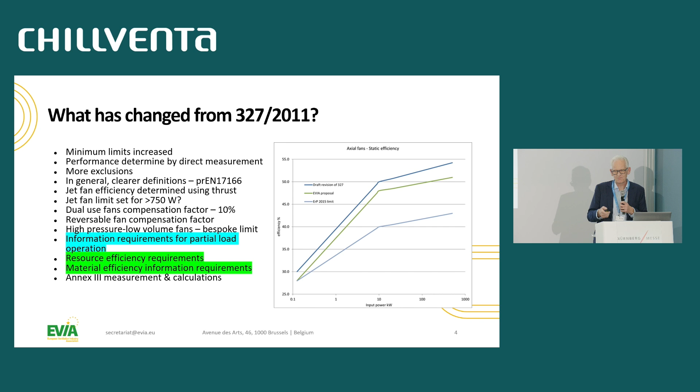The blue and the green, though, is the start of what's coming next for us in the future, but also other products. It's the circular economy, the sustainability aspects. I would argue these are fairly simple, but they are a big impact on us as a business. We have to produce a lot of information to meet these requirements, but it gives us an indication of what is going to come next.

Sadly, the regulation that was published in July has got some errors. So one of the errors is in Article 9, and to be clear, the application of the requirements of this regulation will happen in 2 years' time, and it will be 3 years for fans integrated in other products and 13 years for spare part fans. That doesn't say that there. So Ronald Piers is in the process of raising a corrigendum, a correction. And also, we found, when it was published, there was a tolerance of 2% on speed, which many fan manufacturers will find challenging. So we've managed to persuade the Commission that we should change that to 5%.

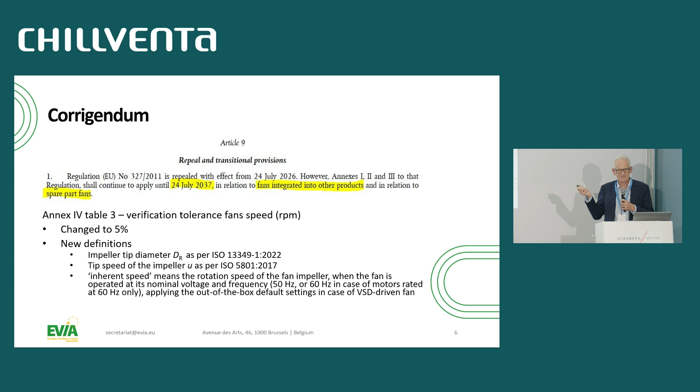But member state Italy wanted some extra definitions in impeller diameter, tip speed, and what is the speed? And so when do we measure our performance? Do we measure it at maximum speed, and what is maximum speed? That's still causing us problems, even though we have lots of definitions in standards. The text there is what the policy officer has put into the revision. If you don't like it, we have to try and persuade otherwise.

Okay, status of the standard: there's a standard that did run parallel with the review of this regulation. Unfortunately, it's been delayed because of COVID and some confusion, but it's now in a position where it's gone back to inquiry and it's out for voting. So those of you that are involved with member states standards groups, make sure you put your vote in and make your comments now, because this standard will be reviewed later this year. The changes were feedback from the policy officer. There were some things in this draft standard he wasn't happy with. We'll try to take that on board, but we need this standard because it adds clarity to the regulation.

There's some interpretation. Even though this regulation has been published, some things still aren't very clear. And so the industry, Eurovent and European AMCA, for example, have really started the process of frequently asked questions, and EVIA will be part of that. And some of it is things like this compensation factor for the guard. There was some text on the left that Ronald Piers put in to previous comments around the revision that hasn't gone into the main standard, which is probably good. But the compensation factor for this guard is based on the gap between the rings of the guard. And the question is, if you had a guard where the gap in one place was, say, 6 millimeters, but the rest was at a gap of 15 millimeters, which compensation factor should you use?

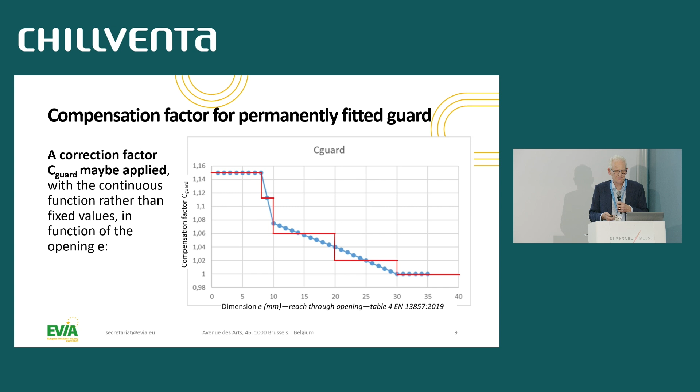The problem now, though, is what compensation factor would the market surveillance apply on you? Because you make a decision. You might think, oh, well, I know what I'm going to use. I'm going to use the 1.16 or 1.15 compensation factor. But the market surveillance could have a different opinion. They have more power than you, and therefore they could say, you've got it wrong, you've got to change. So we need some clarity there, and that's where we as an association have got to work on these FAQs that we can put towards Ronald Piers, and hopefully he will adopt the FAQs from industry.

Okay. What I wanted to major on more in my slot was the new things that have come into this regulation since the last regulation, and it's the circular economy things. It's environmental impact in the form of resource efficiency and material efficiency. This is, in some ways, simple, but it creates work for us as manufacturers. We now have to provide spare parts. We have to provide them within 6 weeks. We have to provide information on how to dismantle our fans and how to repair our fans.

Yet there's still some grey areas that we as an industry have to think about how we handle. For example, variable speed drives. If the variable speed drive is integrated in the electronics of the motor drive, how do you provide that as a spare part?

So therefore, there's some interpretation that we need to make to put towards the policy officer to get them to agree: is this a good interpretation? Can we provide spare parts this way?

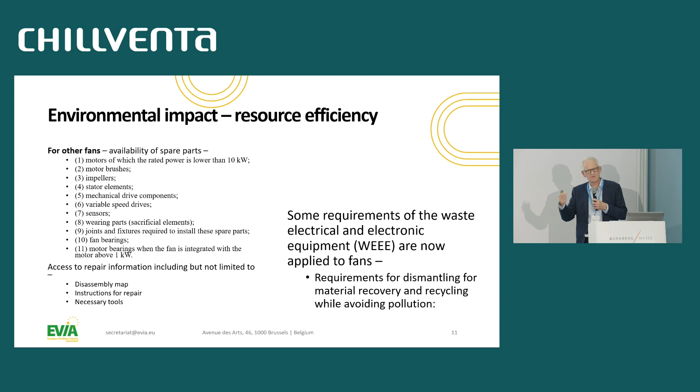The regulation also now starts touching on other ones. I remember a lot of people saying the Waste Electrical and Electronic Equipment Directive has nothing to do with our product. It does, because we've just been sucked into it. Inside the fan regulation is a reference to the WEEE regulation, and therefore for chemicals mentioned in the WEEE regulation, we have to make sure if they're present in our product, we make a declaration they're there. We have to explain how to remove them at end of life. How can you extract those chemicals, and how can you reprocess them?

Material efficiency is probably not the right heading in the regulation, but this is what the heading is. It's talking about how we have to provide professional repair services. Do we have to do that as a business, or do we have to point to somebody else? And also providing information on spare parts. And one that I didn't highlight is proprietary tools, special tools. So if we need special tools to take our motor and fan apart, we have to provide that information. But how much? Do we have to provide information on how they make it, or what it looks like?

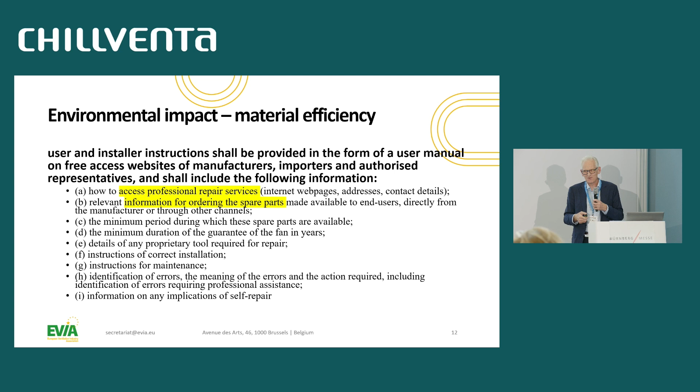And then what's next? We know what's next in Article 8 of the regulation. It states very clearly what will be reviewed next time. So, for example, the Commission will look at fans below 125 watts and whether it's appropriate to regulate them or not. But I've highlighted the circular economy aspects. Resource efficiency, repairability, reuse, recycling will definitely be looked at. And we know that because the overarching regulation, ESPR, will say so. That's what's going to be applied onto our regulation.

But it's 6 years away. And it took the Commission 10 years from the review study to publish. So you could argue it's 16 years away. So why are we worried about this, and also the need for digital product passports? We could be 16 years away before we need to do that.

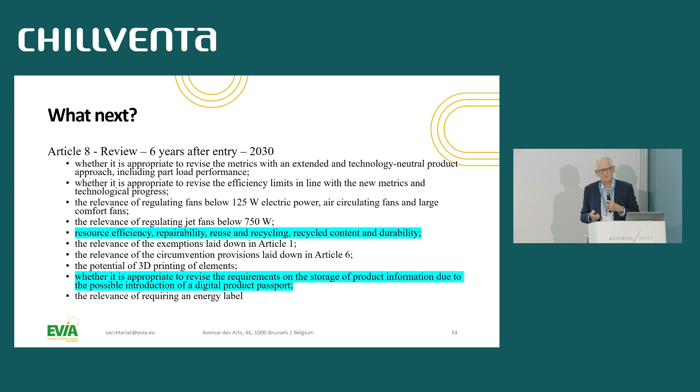Well, in addition to Article 8 of our regulation, we know in 6 years' time ESPR will be applied to us, but the Commission is also running horizontal studies. That horizontal study is looking to do 5 mini projects, and the 5 mini projects could come out with decisions that could affect us, because that's what they said. That's the intent. Question is, which are the 5 studies? You might not be able to read it fully. What I've highlighted is that electric motors have been highlighted as a horizontal study.

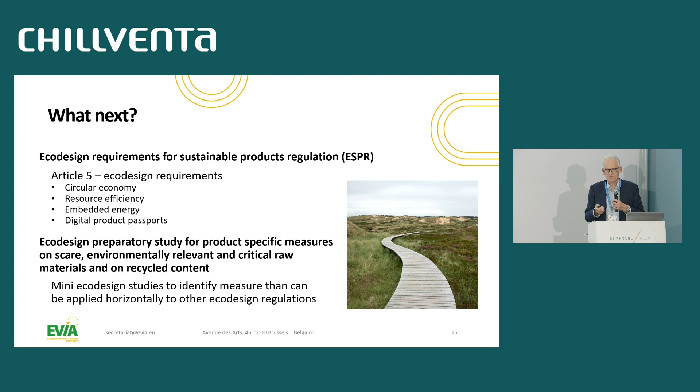In their review, the consultants identified specific measures for scarce and environmentally relevant and critical raw materials. I think we all know what a critical raw material is, for example, rare earths. But what is a scarce material? According to the Commission, ferrous metal. Steel is a scarce material because you could put environmental issues on one side, and on the other side, politics. The politics is we don't want to be beholden to imports into the European market. We want to be more sustainable. We want to recover that steel and reuse it. We want to recover the copper and reuse it because it makes more business sense and it's more sustainable.

So it's a win-win. So this horizontal study will look at steel and copper, and the consultants recognize the data they use is out of date because the market for motors has changed. There are a lot of permanent magnet motors on the market now with electronics and magnets. So the horizontal study will include permanent magnet motors.

And also what they identified was that the Ecodesign motor regulation is due for revision. It's actually overdue; it should have happened last year. But we know from the policy officer, the same policy officer as for fans, Ronald Piers, who is the responsible person for motors, that the review study will start at the end of this year.

Now, are motors inside fans in scope of the motor regulation or not? Currently, the argument is motors inside fans are excluded. But the wording is weak, and it's about interpretation. So when the regulation is revised, will that wording be improved, or will that wording be removed? And therefore, will our motors inside our fans now fall within the scope?

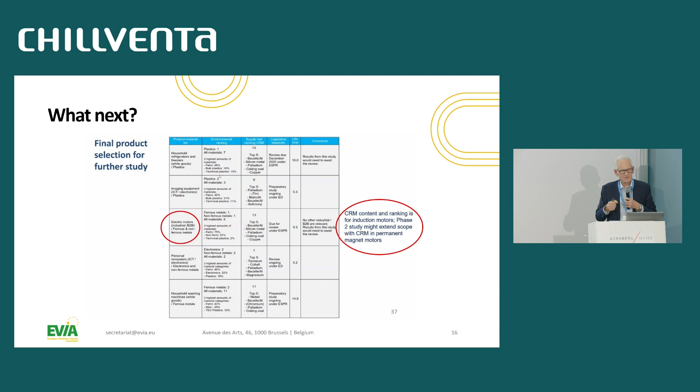And if we now fall within the scope of the motor regulation, everything we just talked about, repairability, reuse, recyclability, material content, is not 16 years away, it's 5 or 6 years away. The review study will be a year, there'll be 2 or 3 years of argument, and then they will update the motor regulation. So this will impact us medium term or long term. We don't know yet. We've got to stay close and watch it.

So in summary, the revised regulation sets some tough new standards, which Ronald talked about. There's some corrigendum, some changes that have to be done. There's interpretation. The industry has to come up with a frequently asked questions document to clarify, if not for ourselves, ideally to convince the Commission this is the correct interpretation. And it also has some environmental impact, circular economy requirements. But what's next? The ESPR, circular economy, will definitely come sometime in the future. It could be short term, 5 years, or it could be long term, 15 years.

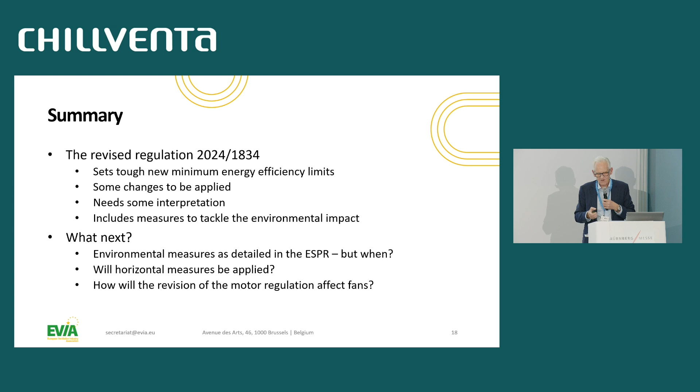And on that note, I'm going to pass to Alex, who will talk a little bit more about sustainability.